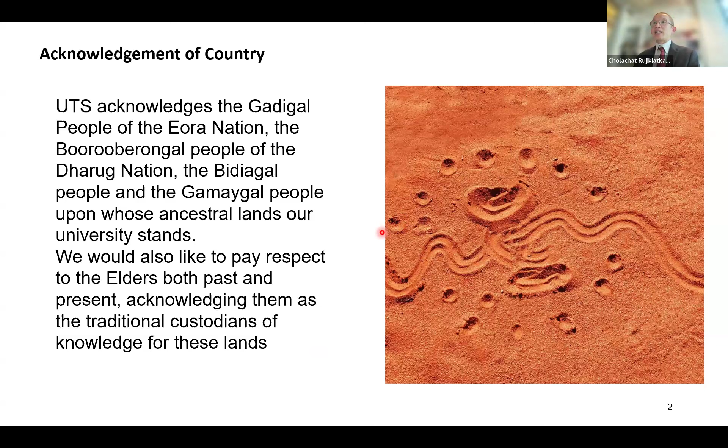For Australia, we have to acknowledge the country. We would like to acknowledge the Gadigal people of the Eora Nation, the Boorooberongal people of the Dharug Nation, and the Bidiagal and Gamaygal people upon whose ancestral lands our university stands. We would like to pay respect to elders both past and present, acknowledging them as the traditional custodians of the knowledge of this land.

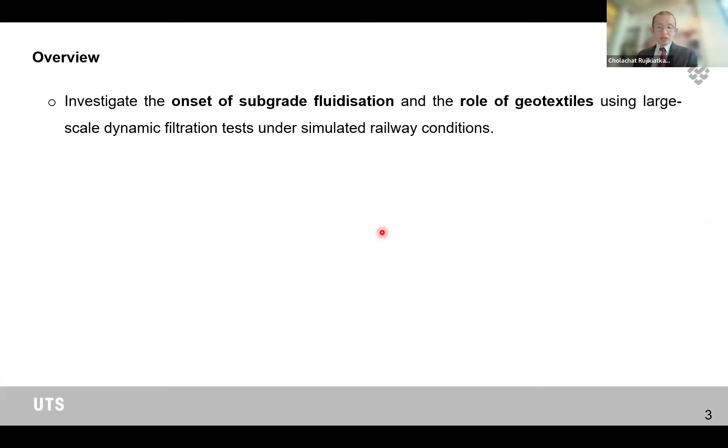For today's presentation, we will start by looking at the issue of subgrade fluidization, or mud pumping, in railways, and investigate the role of geotextiles using our unique large-scale dynamic filtration tests under cyclic loading.

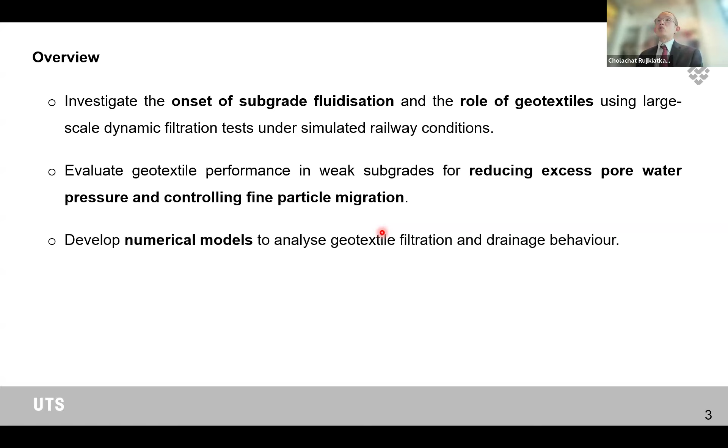We are going to evaluate the performance of the geotextile in terms of reducing excess pore water pressure as well as controlling fine particle migration. After we learn about the mechanism, we should be able to develop numerical models that can be used in real case studies and future projects to analyze how geotextile filtration and drainage behavior affect soft subgrade soil. At the end, we will have some user-friendly software that can be presented for industry application.

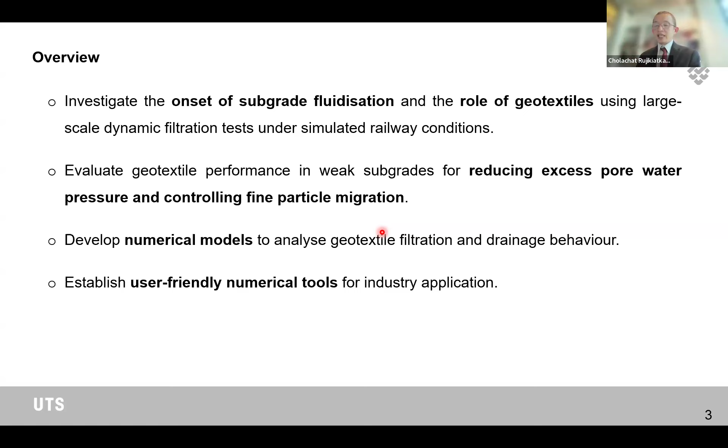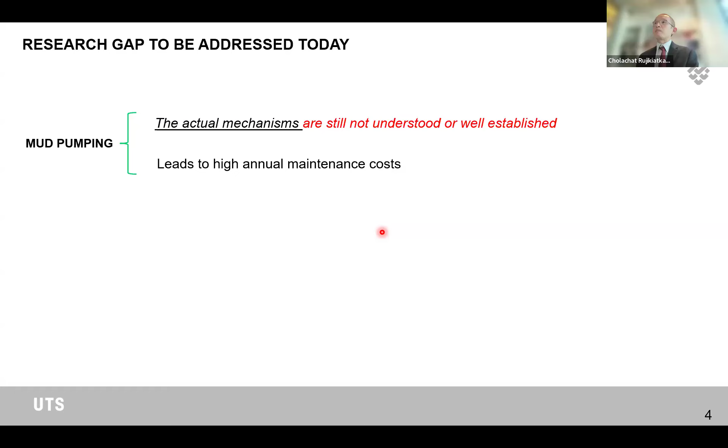For today's presentation, we are going to discuss the mechanism of mud pumping that still needs further understanding - how we can differentiate this from undrained yielding, and also prevent this to minimize maintenance costs for railways under operation. We will also look at solutions to improve the drainage capacity of the entire track using the application of geosynthetics, and how we can select an appropriate design of geosynthetics to ensure it fulfills the performance required in railway engineering applications.

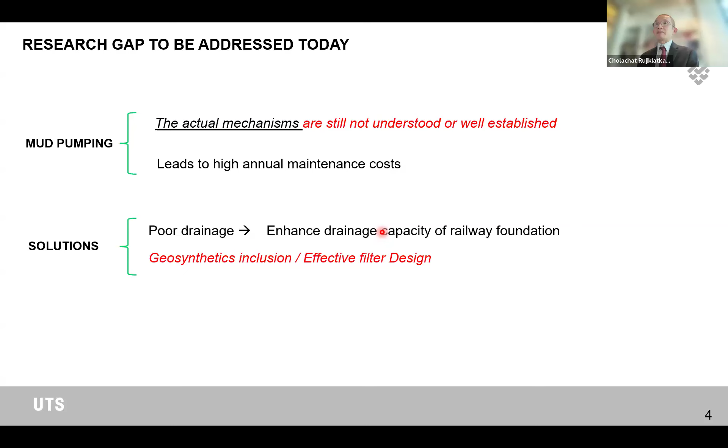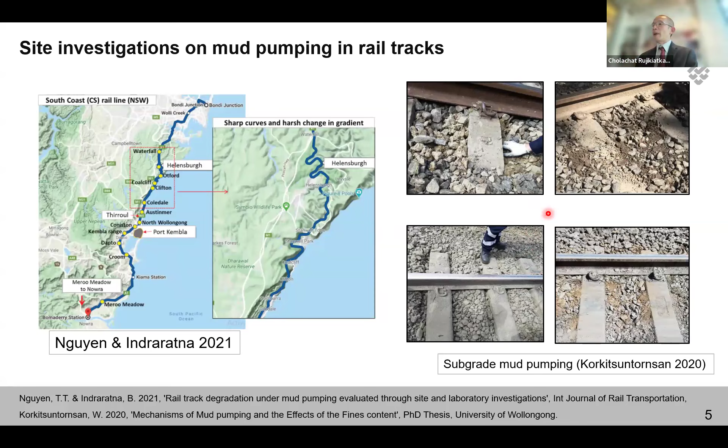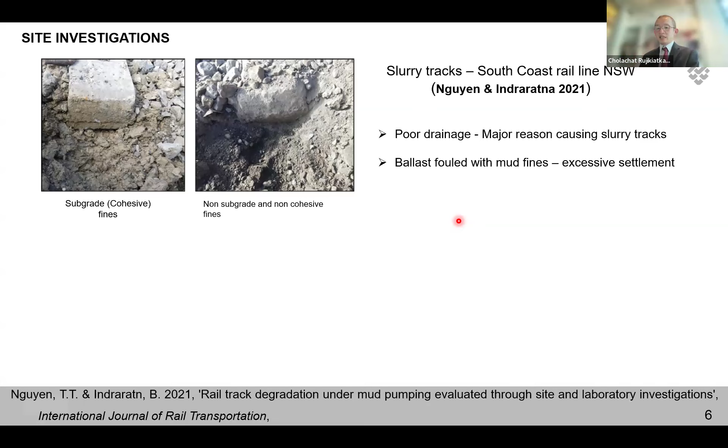Continuing with the site investigation, we started doing cross-section analysis. When looking at the problem of ballast fouling, we started digging down and getting samples. You can see the photo of foul ballast that has been filled with fine-grained soil pumped up from the subgrade, as well as damage from the sleepers. You can see that the ballast particles no longer exist - the entire area has practically become filled with fine particles from the subgrade.

When the worst case comes, as observed in the freight train line in Canada, you have excessive foul ballast in this area, and there's nowhere for the fine particles to migrate. This can create what we call actual mud pumping, where when you run the train on the track, we can see the actual ejection of fluid and fines during the train's passage. Quite often we try to prevent this from happening even beforehand.

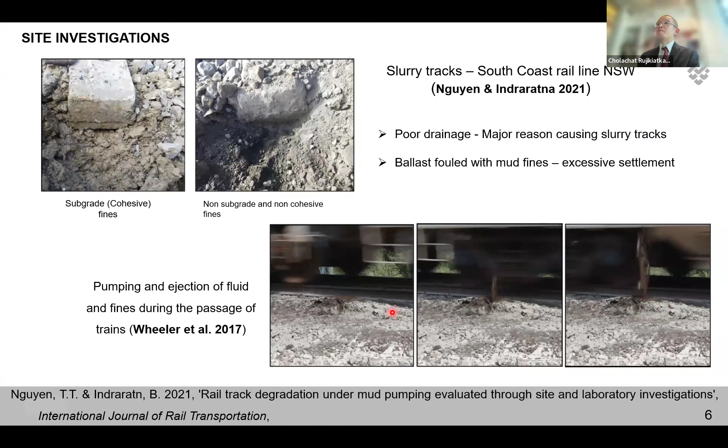Based on the investigation, we found the typical soft subgrade soils that have the potential for mud pumping - this is a typical particle size distribution, as well as the crucial properties we need to consider, which is the combination between plasticity index and liquid limit. The liquid limit is the index that indicates that if the water content or moisture content of the soil reaches that value, the soil can behave like a fluid. That's why we term it fluidization.

Based on the site investigation and data from previous studies and the current study, we see that the liquid limit is relatively low, in the range of 30 to 50%, as well as the plasticity index, which is in a very narrow range as well, around 20 to 30%. This means this type of soil has the potential to mud pump easily, and it can create instability of the track itself.

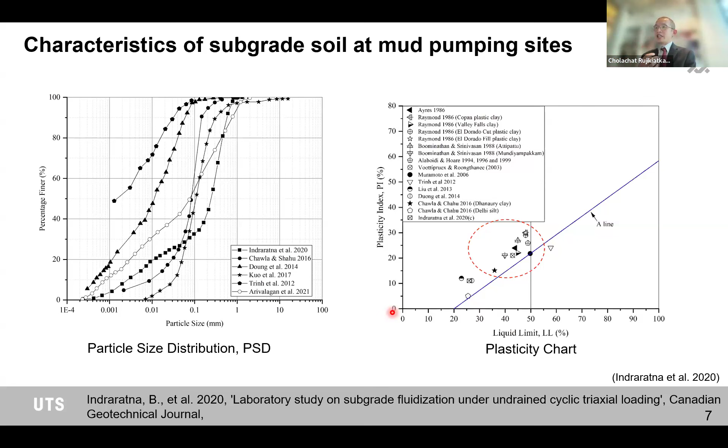With the collaboration of Global Synthetics, we came up with unique testing equipment where we can accommodate a larger sample of the soft subgrade soil, as well as the ballast above it. Together, we can install the geotextile at the ballast-subgrade interface, and with actual measurement of excess pore water pressure and settlement, we can apply cyclic loading on top of the soil sample and observe the change in settlement as well as excess pore water pressure within the soil sample. The soil sample was collected from the mud pump site and reconstituted and brought back to the laboratory so we can study the mechanism and causative effects from this cyclic loading on the soil sample.

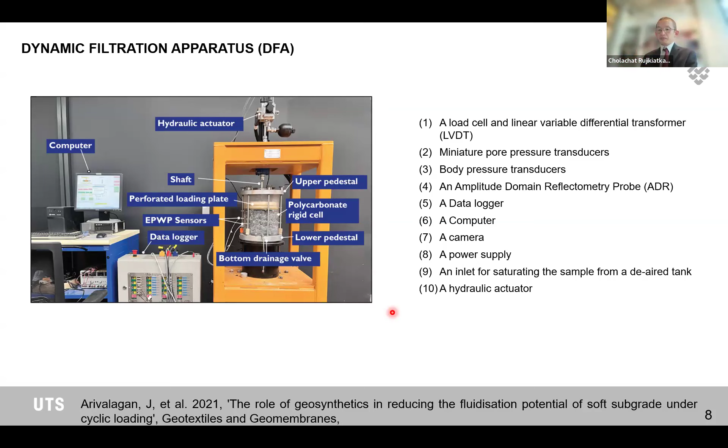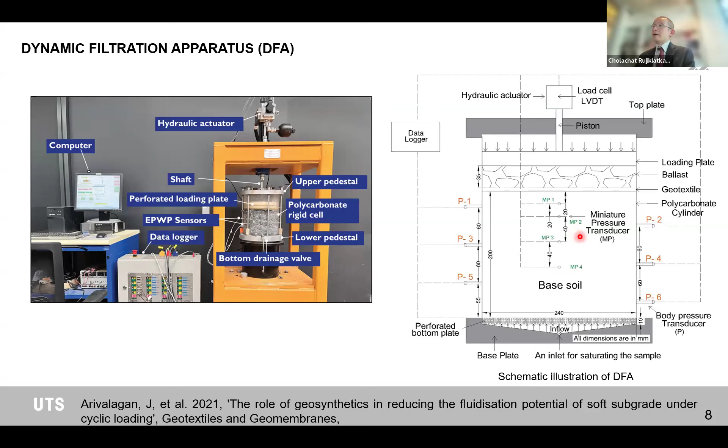In this experiment, we put intermittent sand layers between the subgrade soil layers to make this an indicator of whether fluidization is happening. You can see the transition between the initial condition, where individual sand layers are clearly visible, and after a certain number of cyclic loadings, the top layers disappear and mix with the fine clay particles.

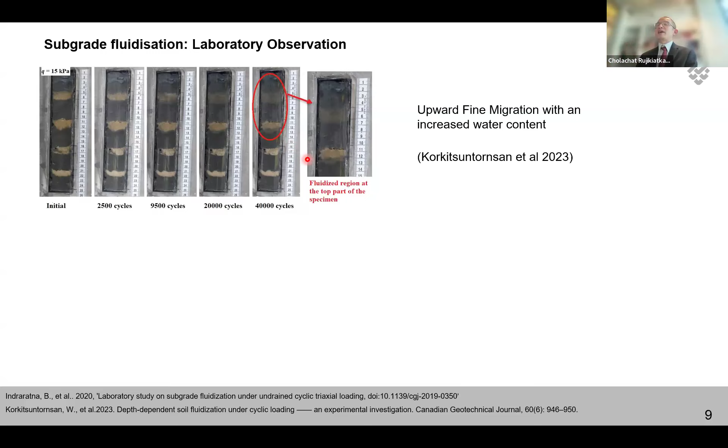We can conclude that upward particle migration has happened because the color of the sand layers at the bottom of the sample remains intact and does not change at all. Because of the upward migration during cyclic loading, the color of the sand layers itself changes, and eventually the sand layers disappear at the end of the test.

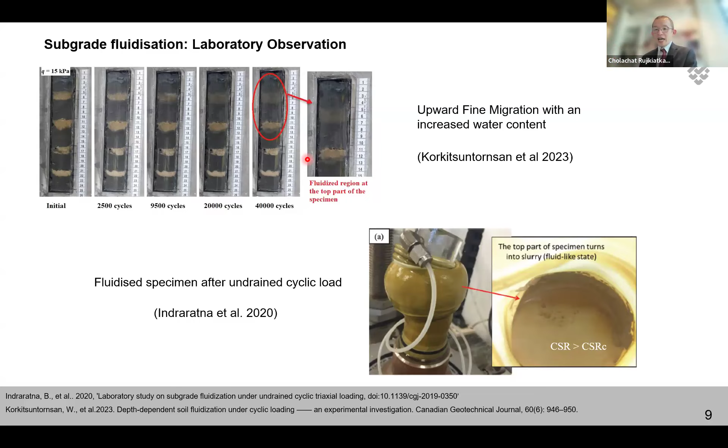Apart from this sample, we also observed fluidization happening during undrained cyclic loading in the triaxial test. The failure mode under fluidization occurs at the upper portion of the clay sample. Once we complete the cyclic loading, we can take the top pedestal out and observe the fluid-like sample at the top, showing there is a transition from the solid state to a fluid state after applying cyclic loading.

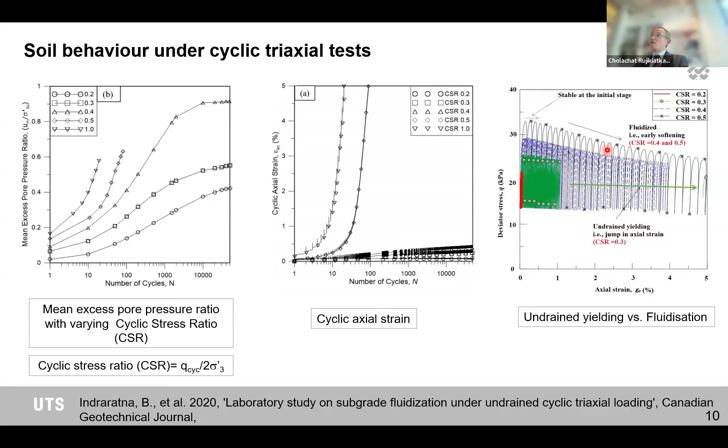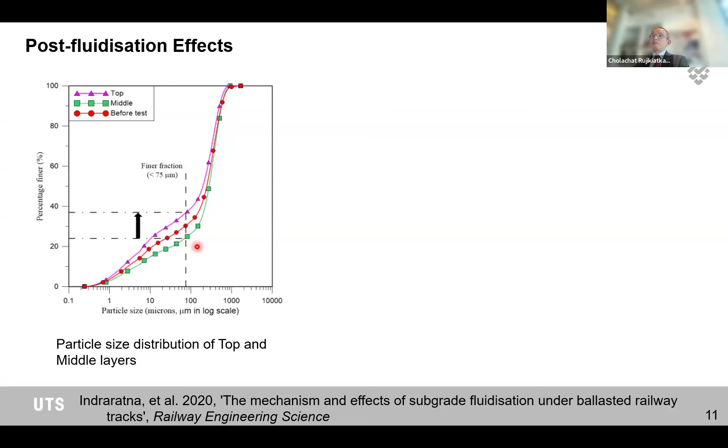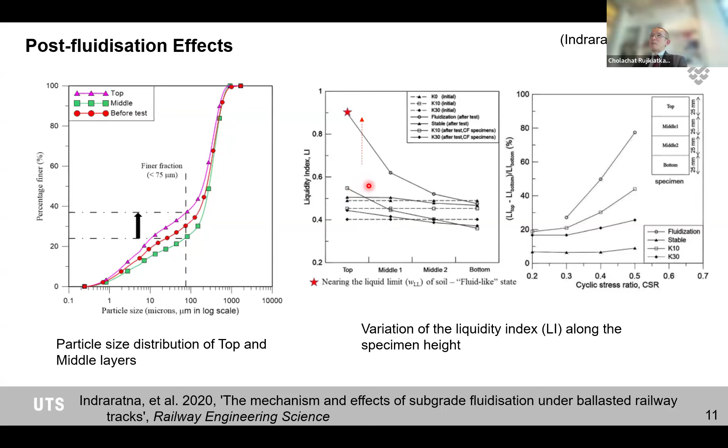Apart from this particle size distribution, we also measure the moisture content of the sample at different depths. It shows that for the fluidized sample, the water content has approached the liquid limit, while the stable sample and other sample, the water content remains constant throughout the entire depth of the sample. Based on this observation, we can characterize and differentiate the mechanism of the instability of the undrained yielding sample and fluidized specimen under cyclic loading.

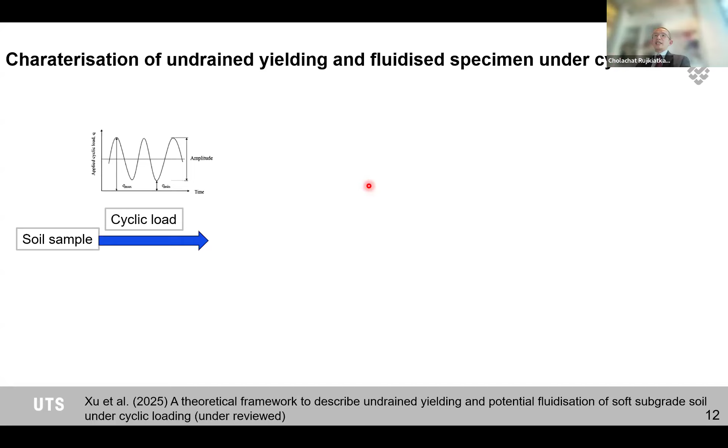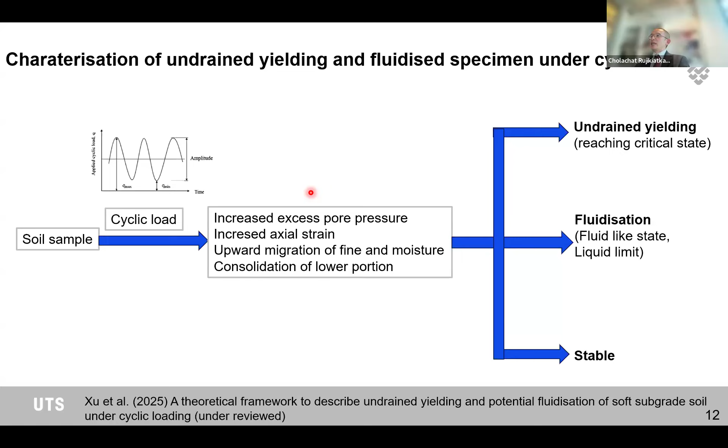When we subject the soil sample to cyclic loading, we expect an increase in excess water pressure, increase in axial strain, upward migration of fines and moisture, and maybe consolidation at the lower portion, which can lead to either undrained yielding, where you reach the critical state and the soil fails, or fluidization, where the water content of the top portion reaches the liquid limit with fine particle migration in the top portion, or the soil remains stable throughout the application of cyclic loading.

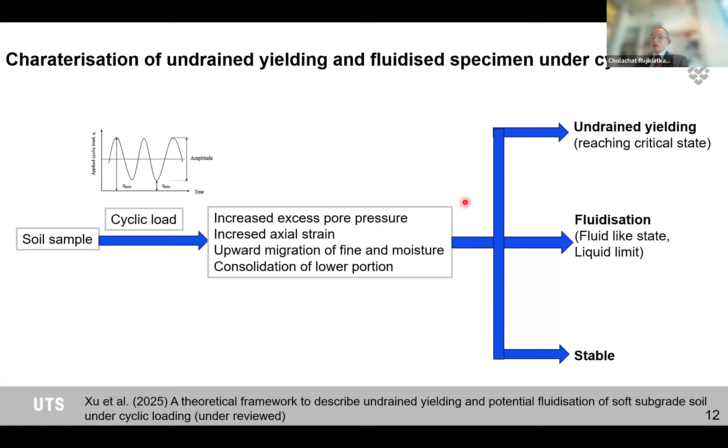Now, once we understand this mechanism of fluidization and undrained yielding of the soft subgrade soil under railway track, under the condition of cyclic loading, we try to find a way to mitigate this issue with the application of geosynthetics and vertical drains in railway track.

As you can see, cyclic load induces excess water pressure and upward fine migration due to the hydraulic gradient that shoots fines up into the ballast layer. Therefore, if we can provide additional drainage to reduce excess water pressure development and prevent migration of fine particles from the bottom layer, preventing loss of these fine particles, then we should be able to mitigate the issue of mud pumping.

In the past, we used sand blankets for this purpose, and sometimes it's not so environmentally friendly, since you have to quarry good quality sand to use in the railway track. Another option might be the use of geosynthetics as a filter layer and drainage layer, therefore avoiding the use of natural material for this purpose.

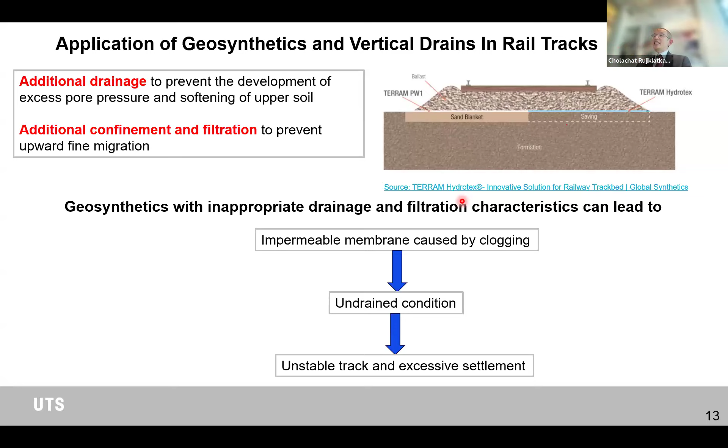However, this application of geosynthetics in railway track is not a new topic. This has been applied in various embankments to provide drainage, but quite often the issue lies within the railway track itself - at the beginning everything seemed to work very well. However, upon long-term operation of the track, it shows that these geosynthetics might create a clogging phenomenon where fines start accumulating and reducing the drainage capacity of the geosynthetics.

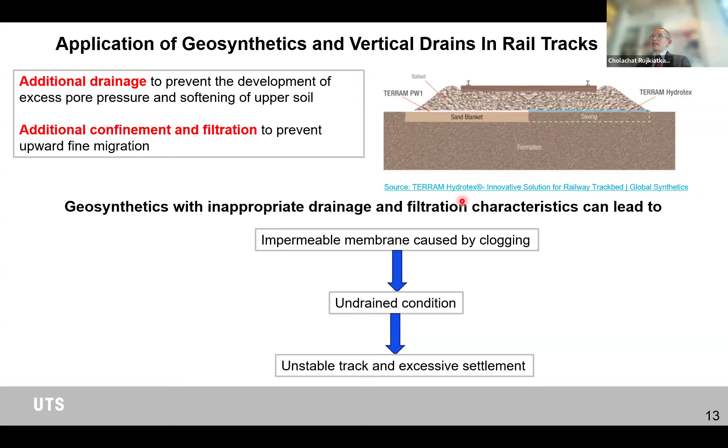This often creates further adverse effects because it acts like an impermeable membrane, preventing even fine intrusion and making the track vulnerable to slurry because of the impermeable boundary created by the clogged geotextile. With this type of long-term issue, it can create an unstable track and also excessive settlement.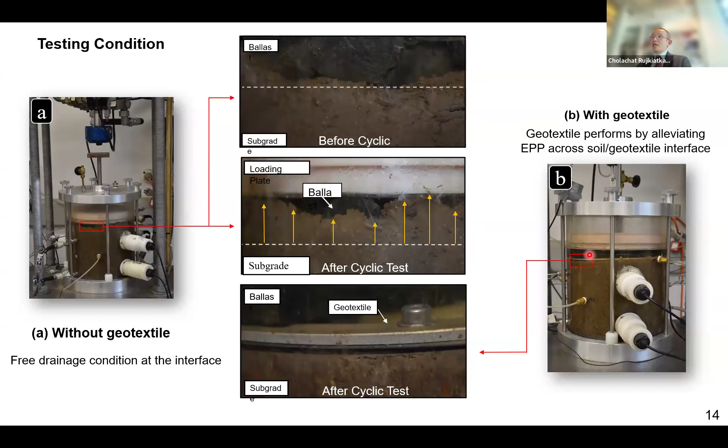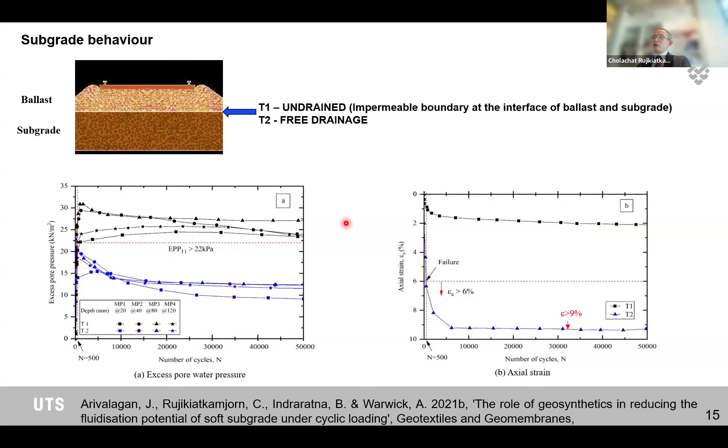Now, the next phase of the testing program is we try to investigate the use of geotextile to prevent the fluidization of the soft subgrade soil. We have three types of geotextile.

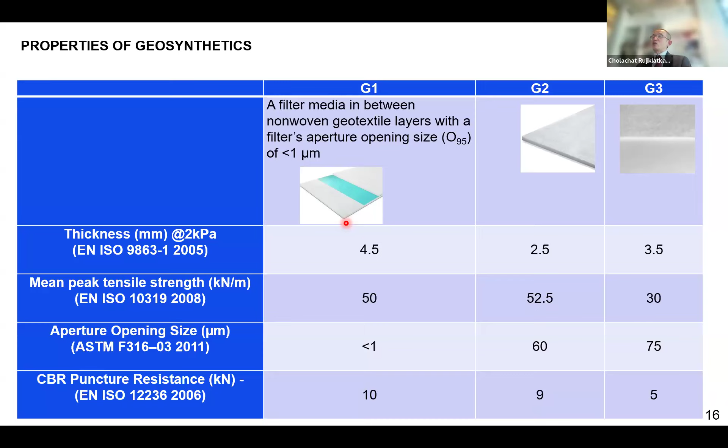The first one, G1, is the specially designed geotextile where we have the blue filter media with an aperture opening size of less than 1 micron. G2 has an AOS of approximately 60 microns, and G3 is 75 microns. We try to investigate the performance of this geotextile under long-term cyclic loading and find out the advantage of having the filter media in the middle, to determine whether G1 is more efficient compared to the conventional geotextile G2 and G3.

Now let's look at the result of the performance of the different geotextiles, focusing on G1 and G2. You can see that overall the dissipation rate based on G1 is much higher compared to the measurement of excess pore water pressure dissipation rate by G2. This is also emphasized in the performance comparison between G1 and G3 - the dissipation rate in G1 is much faster, reducing the excess pore water pressure closer to 0. The percentage reduction based on the excess pore water pressure measurement can be up to 90%.

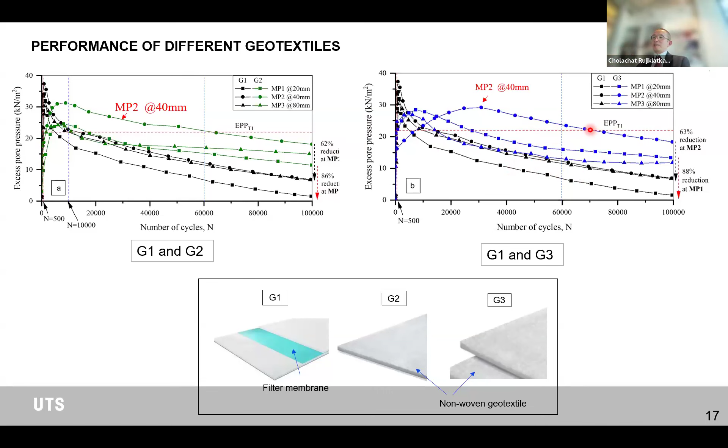Now, in terms of excess pore water pressure gradient, which is the consequence of different excess pore water pressure at different depths, you can see that the hydraulic gradient for the soil sample with G1 is very low compared to G3, confirming that there is much less pressure pushing the fine-grained soil upward into the top layers compared to the G3 geotextile.

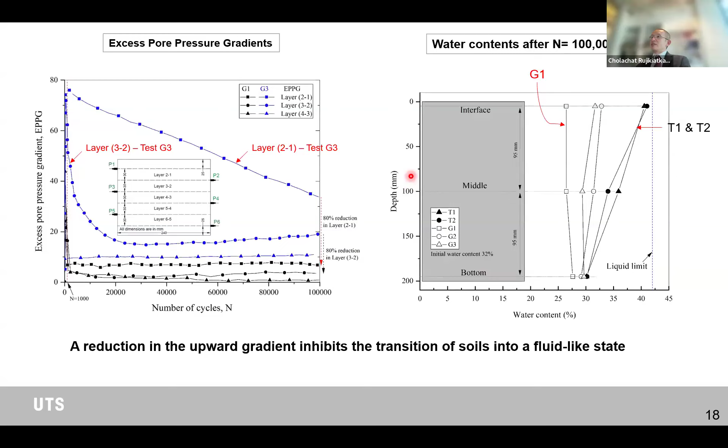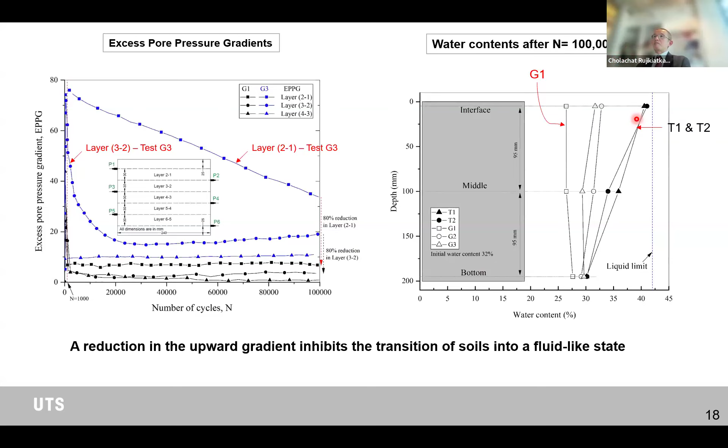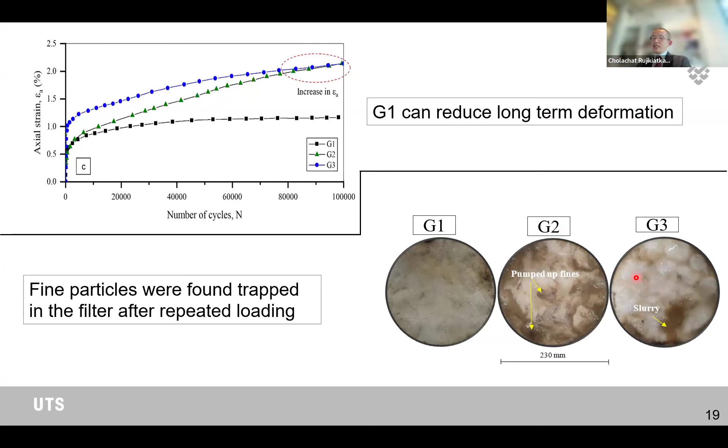Another benefit of the G1 geotextile is that it can also minimize the development of axial strain compared to the axial strain developed under G2 and G3. We also have photos of the geotextile after completion of the test. You can see that the color of the G1 geotextile after the application of cyclic loading is a bit cleaner compared to the other cases, where you can see fine particles trapped within the filter of the fabric, showing the advantage of G1 for this type of testing.

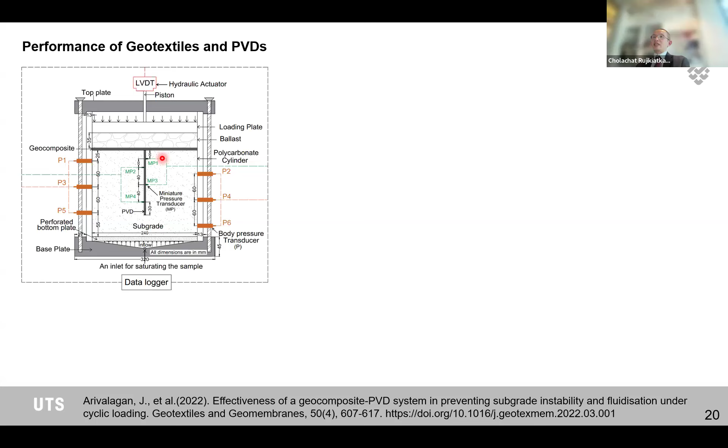Apart from this, comparing the performance of the geotextiles, you can see that the induced excessive hydraulic gradient created within the depths can be minimized if we have additional subsurface drainage that penetrates beyond the surface of the subgrade. In this case, prefabricated vertical drains have been installed at shallower depth to facilitate drainage of water inside the soil mass, as well as dissipate the excess pore water pressure. We use the combination of vertical drains and geotextile to ensure we can minimize the upward hydraulic gradient, and therefore create better stability of the soft subgrade soil under cyclic loading.

Here on the right-hand side are the results of the excess pore water pressure with the number of cycles. You can see that with the combination of vertical drains together with geotextile, the excess pore water pressure can be reduced drastically compared to the test with geotextile alone.

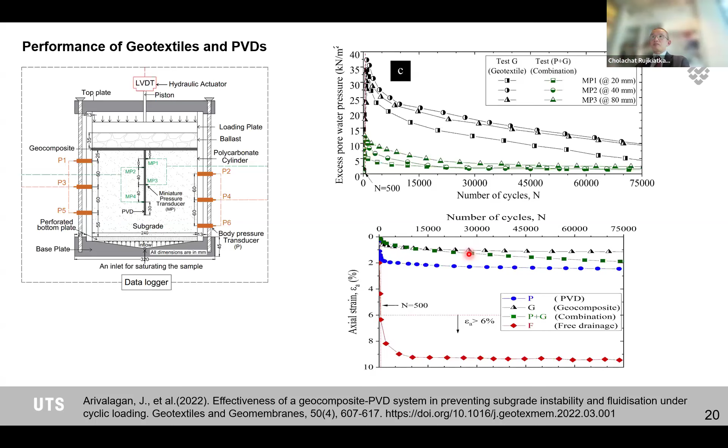Also, if you compare the deformation aspects from this test result, they are on par with the geocomposite alone. It can be seen that the use of vertical drains can facilitate better dissipation of the excess pore water pressure at greater soil depth within the shallow region of the soft subgrade soil. This might be another combination to consider if there is an excessive mud pumping issue at a certain location, allowing us to further reduce the development of excess pore water pressure along the depth of the soft subgrade soil.

Now, when we consider the nature of railway loading, from the previous test we apply the cyclic load in one go, which means that we don't stop in between.

We apply 75,000 cycles in one go and measure the performance along the continuous number of cycles. However, if we consider the actual freight train operation, the nature of the usage of the track typically is what we call intermittent, where you have the train run on the track, followed by a rest period where there is no train, followed by the next service of the train. We would like to investigate what's going to happen during this combination of intermittent cyclic loading with the presence of the geotextile.

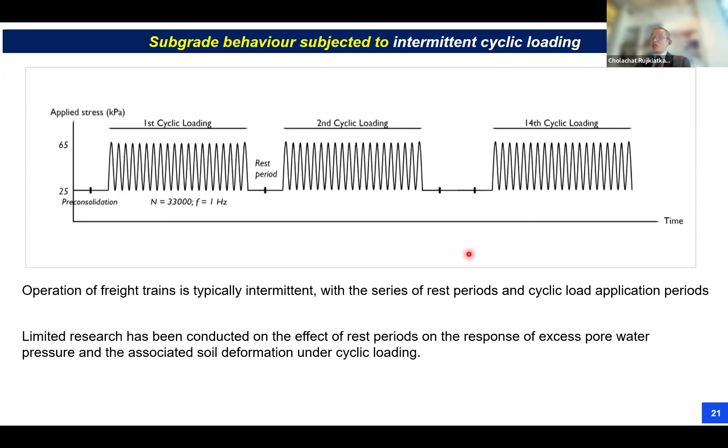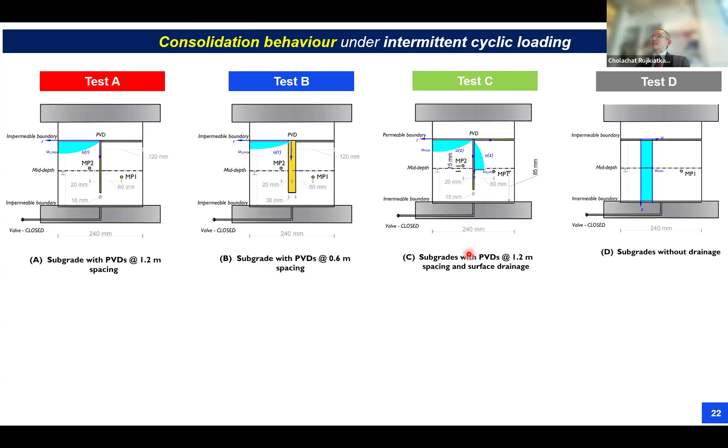For this one, we extend our test from the continuous cyclic loading, and we have conducted 4 series of tests to simulate the effect of the vertical drains with different drain spacing ranging from 1.2 meters to 0.6 meters, as well as the presence of the geotextile on top of the subgrade, compared with the worst case scenario where we do not have any drainage at the interface between the ballast and the subgrade soil.

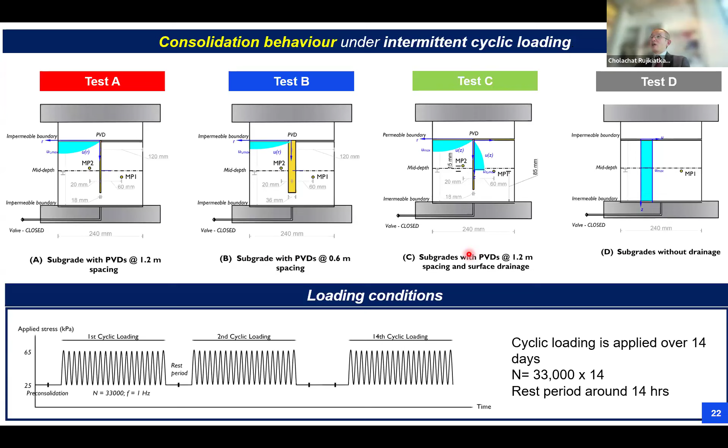This is the intermittent cyclic loading condition where we have applied 33,000 cycles for each round of loading, followed by a rest period of around 14 hours, representing the usage of the freight track in Australia.

Now let's look at the measurement result of the effect of the intermittency. You can see that we have the excess pore water pressure measurement here and vertical strain in terms of time, as well as the cumulative number of cycles. The cumulative number of cycles is excluding the effect of the rest period.

You can see that in test D with no drainage, the sample failed upon the fourth cycle of the intermittent loading. Based on the excess water pressure measurement, you can see that the vertical drains can help in terms of dissipating excess water pressure. From the test result, the combined vertical drains together with geotextile can further speed up the dissipation of the excess water pressure during the loading, as well as the dissipation during the rest period itself.

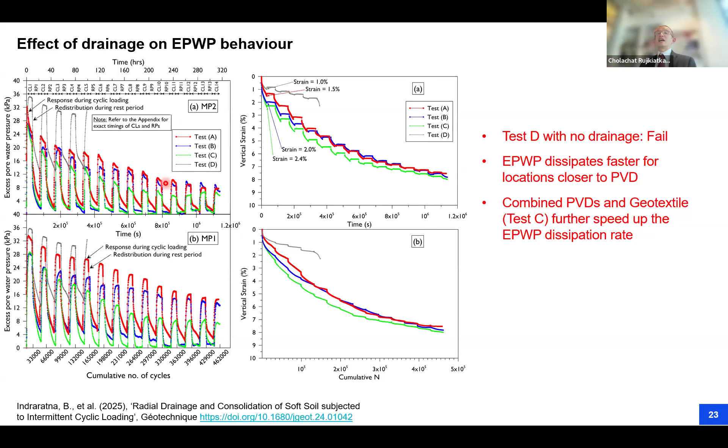Now let's look at the effect of intermittency here. If we look at the presence of the drainage, you can see that the excess water pressure has increased with the deformation, and during the rest period itself you can see that there is a dissipation of the excess water pressure. However, during this time, you will not observe any development of the settlement within the soil sample. It's just like the soil sample experiences a relaxation period where the water pressure just disappears.

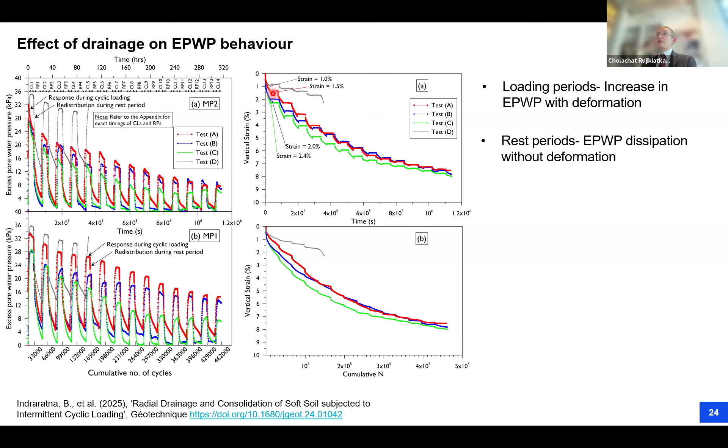Right now, you can also see that during the subsequent cyclic loading, the amount of the settlement starts decreasing. This is because the reduction of the void ratio from the previous subsequent period increased the yield stress and made the soil stronger, and therefore with the next application of cyclic loading, the development of the settlement becomes lesser and lesser.

Also, if you look at the excess water pressure response here, you can see that if the soil experiences settlement and is subjected to the next cyclic loading, the excess water pressures tend to decrease because the yield stress increases and the void ratio of the soil decreases. With these two combinations, it makes the structure of the soil stiffer, and therefore causes less excess water pressure development.

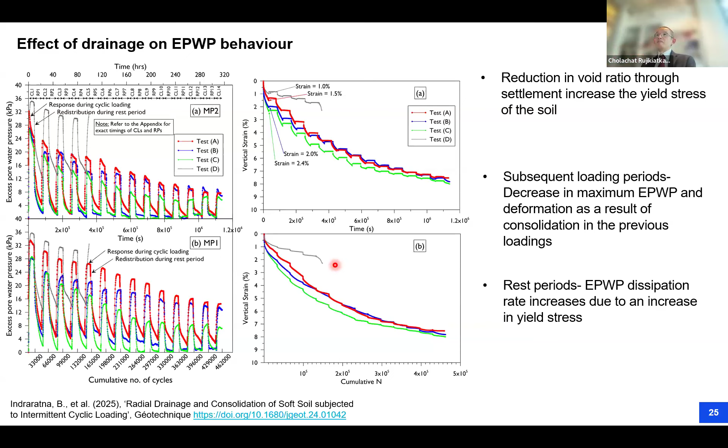Now, based on what we observed so far from the test and the effect of the intermittency, we can say that the reduction of the void ratio can link to the increase in yield stress, as well as the increase in the excess water pressure. The amount of the increase depends on the current yield stress of the soil, which means that if your yield stress of the soil is quite high, then there is a chance that the excess water pressure development can be less because the soil is much stiffer.

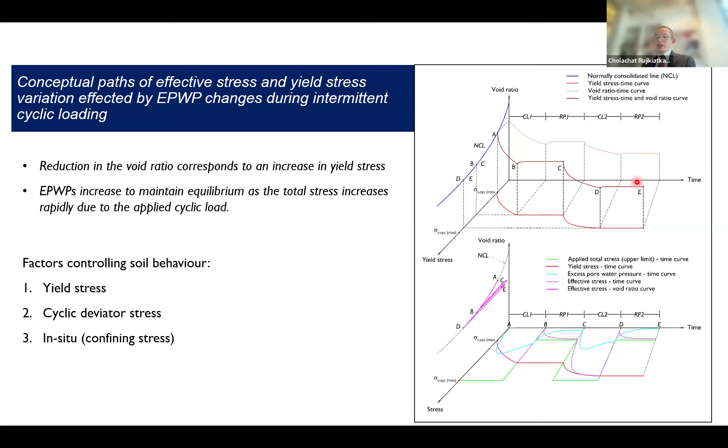Based on this observation, there are factors that control the soil behavior when it's subjected to the intermittent cyclic loading, which include the yield stress, cyclic deviatoric stress, meaning how heavy the axial load is, as well as the in-situ condition, including the confining stress that can be captured here. Based on the plot, we can have the stress path in terms of a three-dimensional plot showing the relationship between the void ratio, yield stress, and time. Based on this observation, we can come up with a new normalized factor, which we term the normalized yield stress for cyclic loading.

If you would like to have a further look at this, just check the publication listed at the bottom of the slide.

You can see that the new index, which we call the normalized yield stress for cyclic loading, is the ratio between the current yield stress divided by the in situ vertical stress plus the cyclic deviator stress, or the amount of the axial load.

Based on this normalized parameter, we can see a clear relationship between the excess pore water pressure and NYCL. You can see the declining trend: as NYCL increases, the excess pore water pressure is reduced, showing that with stronger subgrade soil, you can minimize the increase in excess pore water pressure development.

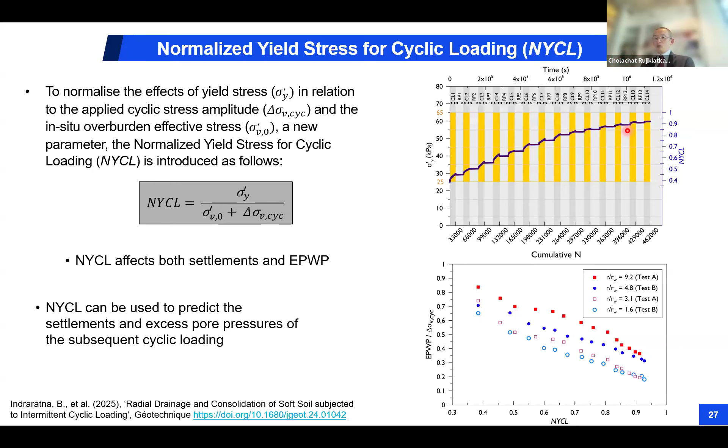Based on this concept, we provide a blended model where we consider the cyclic loading duration, the rest period, and the subgrade yield stress together with the normalization factor, and we combine them and put it into MATLAB.

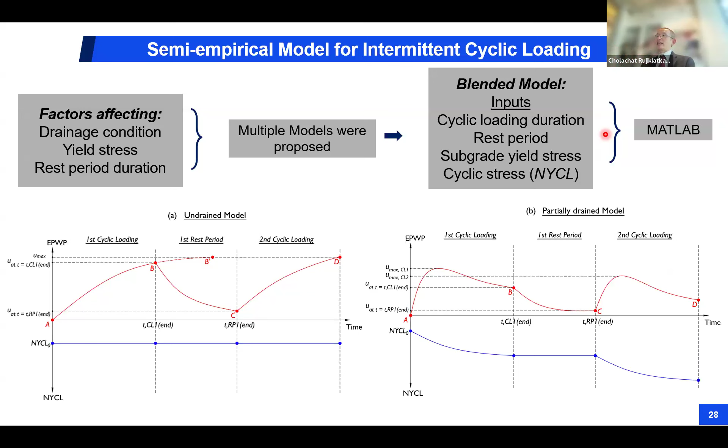These are the subroutines we use to ensure that we can predict the soil behavior under intermittent cyclic loading.

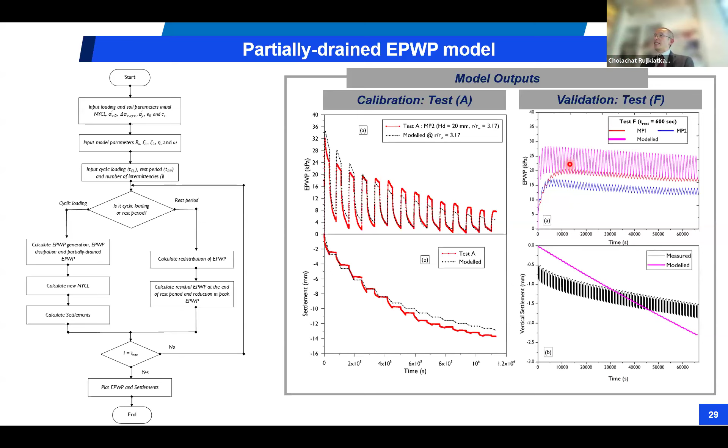We use the calibration from Test A, and based on this, we apply it to the validation in Test F, showing that it can be used to predict the future deformation as well as the excess pore water pressure.

To showcase the field application, we have a historic site where Professor Indraratna first introduced the concept of prefabricated vertical drains installed underneath the railway track.

At Sandgate, the vertical drains were installed at shallower depth within the influence of train loading. At this site, we did not have time for preloading, so we expected to use train loading as the consolidation pressure.

Once the track settles down, we can reprofile the track, pack the ballast, and maintain the alignment of the track after a certain number of cycles.

In his paper, he provided an equivalent concept to predict the deformation of the subgrade soil at the site. However, at that time we still did not have further insight into how the soil behaves under intermittent cyclic loading, because this is the real operation of the track, and the nature of intermittency can only be observed during train operation. He provided a class A prediction for this.

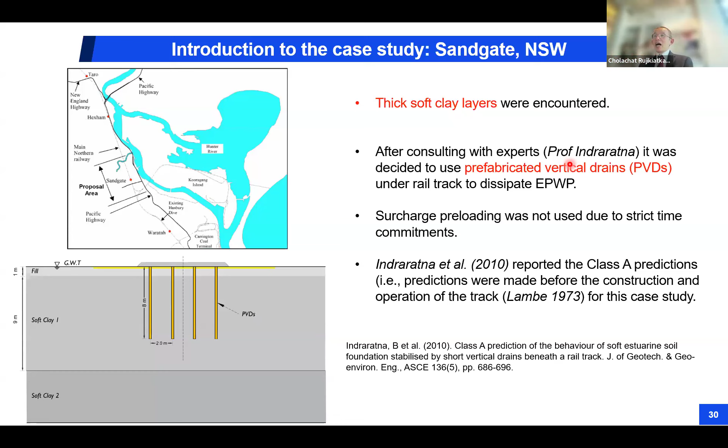Based on observation in the lab, we are able to use this concept with assumed constant intermittency patterns based on the experience of the site engineer Tim Neville. We assume the axle load is 30 tons, the train length is around 1.8 kilometers, and the rest period is around 30 minutes for this ARTC freight rail.

Based on the site investigation data, the pre-consolidation pressure, or the yield stress, is around 25 kPa, and based on that we can produce results close to what we observe in the field.

However, the deviation of the data can be due to the operation of the track, since we assumed constant intermittency rather than relying on the actual site data on the operational program.

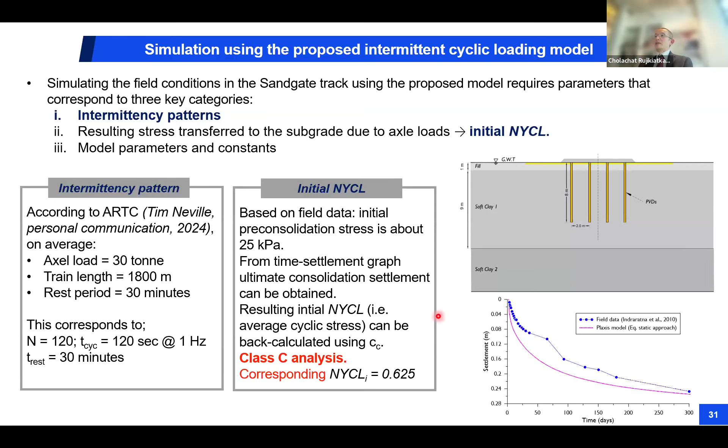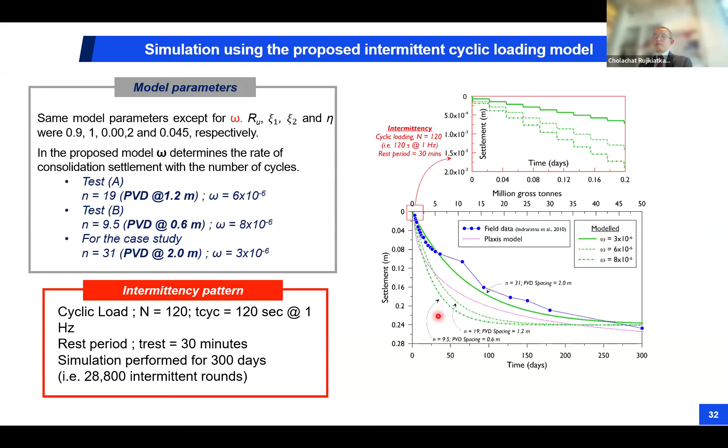Or, if you would like to mitigate the rate of settlement, you can make the drain spacing further apart. Here is the conclusion from my presentation today.

Mud pumping can be induced under cyclic loading for certain soil conditions. This is due to excessive hydraulic gradients, particle migration, as well as increased water content.

Geocomposites with filter membranes can help dissipate excess pore water pressure, as well as reduce deformation and prevent fine particle migration.

The consequence is, if you can reduce the development of excess pore water pressure at greater depth, then you can also reduce the upward gradient in the subgrade soil, and therefore minimize fine migration.

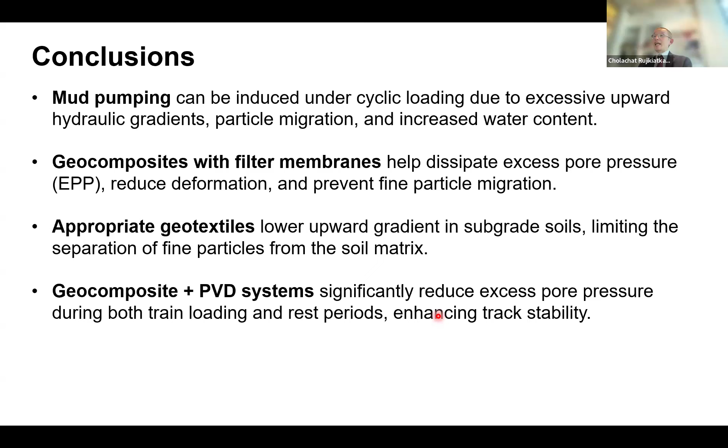And the composite geotextile together with the vertical drains can further reduce excess pore water pressure during the train loading as well as the rest period, and therefore it can enhance the track stability in the long term.

The significance of this study, as you can see from today, is that if we use appropriate geosynthetics in the weak subgrade soil and in rail track, you can reduce the cost of installation of the natural compacted sand, and also control the risk of mud pumping with increased track safety. Therefore, we can extend the life of the track and minimize the frequent track maintenance schedule as well as the cost.

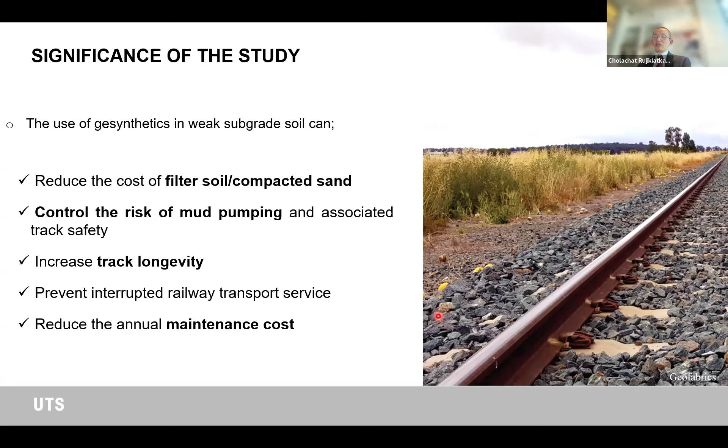At the end, I just want to acknowledge the continuous support from the Australian Research Council, distinguished Professor Buddhima Indraratna, who has inspired and led this research project over the past 10 years in terms of initiating the concept of vertical drains under cyclic loading, and also the PhD students as well as research fellows, including Joseph Chachika as well as Bin Huang, and the strong and active support from Geofabrics as well as partner investigator Andy, who provided further insight and support during this challenging research topic. I would also like to acknowledge the support from ACRI, SMEC, ARTC, Sydney Trains, and other technical staff who made these tests possible and showed further insight of this analysis. Thank you so much for listening to me today.